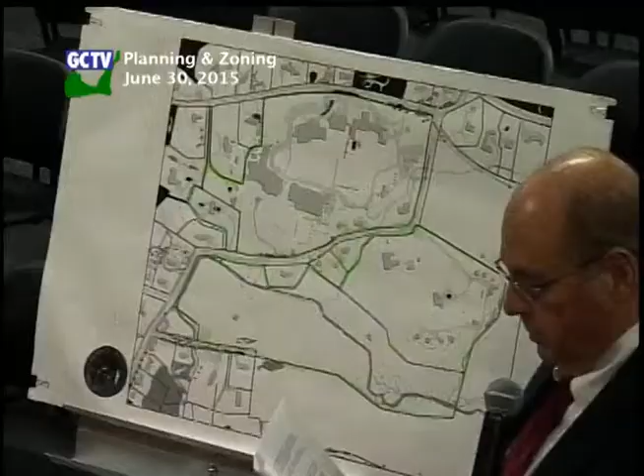Greenwich Country Day School is a co-ed private school in Greenwich, shown here on this GIS map of the town. It has two parcels: the main campus, which has about 33 acres, and lies between Fairfield Road and Old Church Road.

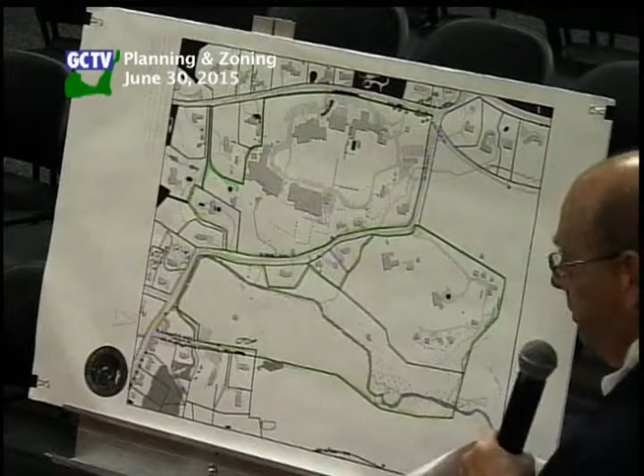Across from the main campus on Fairfield Road is the so-called Schwartz campus, which consists of about 41 acres, on which some of the school's playing fields and some staff housing is located. Tonight we are dealing with the main campus, and specifically the lower school, shown on the left.

This map is twisted around a little bit. North is to my right. Old Church Road is on top.

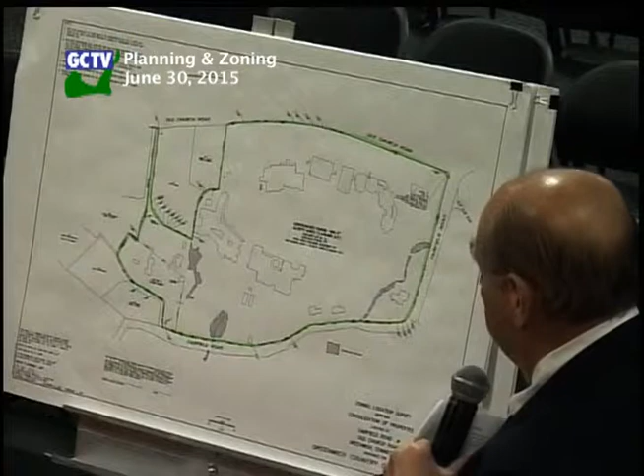The application for the re-subdivision is cast, as you know, in the form of a re-subdivision application, but it seeks confirmation from this commission that the revision of the lot line between two adjacent parcels is neither a subdivision nor a re-subdivision. That's based upon the deed history we've provided, and the fact that the definitions of subdivision and re-subdivision are not met.

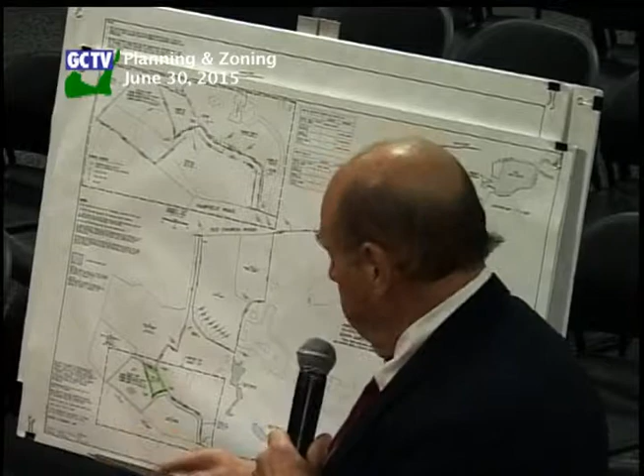The parcel that we want to convey is a piece of property to the immediate south of the main campus, consisting of about 12,600 square feet, and the reason we're doing it is simply to support the additional floor area and green area required for the addition I'll talk about in the following application.

I noted in the staff report, Mr. Cohen, you said 'convey' — from whom to whom? From an LLC known as GCDS to the Greenwich Country Day School. Obviously, that LLC is an entity affiliated with the school.

I noticed one of the staff comments, which I think you may have discussed at your Monday briefing, had to do with a timing issue — whether by agreeing to this, you weren't in effect providing excess floor area ratio for us that will be consumed by the existing buildings. I heard you were seeking Mr. Wetmore's opinion about that, and although we can all benefit from his counsel, I don't think it's a problem.

The reason it's not a problem is that your action, whenever it's taken — and it won't be tonight, I'll tell you why — is advisory only, in the sense that it's statutorily in your hands to determine whether or not a division of property or a revision of a lot line constitutes a subdivision or a re-subdivision.

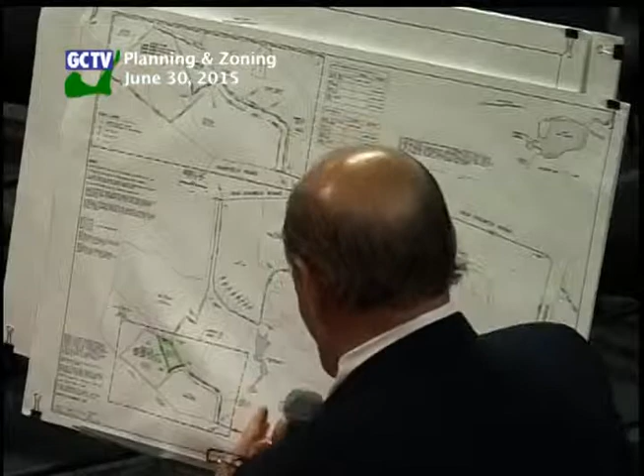We're not going to acquire any additional land until the approval has finalized. And in fact, this is not the first time this commission has been requested to do something like this, nor has done it. In fact, you did the very same thing in 2011. This parcel, a separate lot also acquired by Greenwich Country Day School, was approved on the same basis as we're requesting right now.

But I thought with that parcel, looking at the material, we remedied the nonconformity. You did not. You simply allowed a greater FAR to exist on the campus by permitting the so-called fish building to remain.

I don't think it's a problem, but I don't think you can act tonight on this application because we need a special exception which has been applied for, and we're going to be heard by the ZBA on the 8th of July. So I don't think you could take any action anyway.

Just one quick question on the matter of whether it is a re-subdivision or not. Is this going to be on town sewer, or does it have a septic system? Would Lot 50 have a septic system, or would it be on town sewer? Nothing is going to change from what exists right now. It's all sewer and town water.

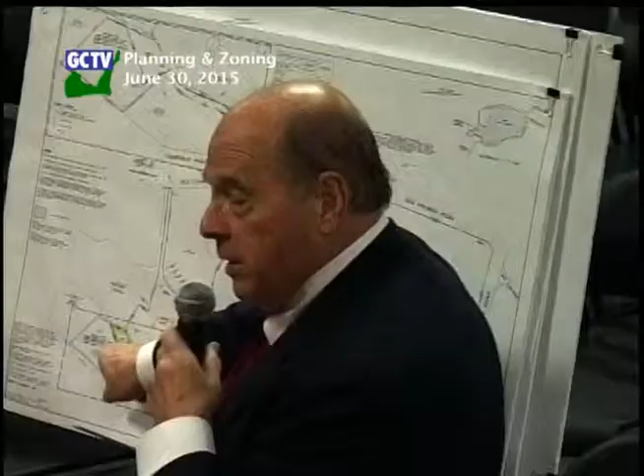I'm sorry, you're talking about the remaining parcel? Yes, what's going to be remaining of the number 50 lot. If the design of that lot included this parcel you're giving away for the septic system, then it would be a problem. I don't know the answer to that question, but perhaps you can seek that.

The question is, does it have a septic system on it? No, it's a vacant lot. It has no house. It's vacant, and we intend that it's going to remain vacant. I believe it is within the sewer boundary, but then the question becomes... if you could just tell us, we'll confirm that. But first of all, the school has no intention of developing that property. It's vacant land.

You never approve the buildability of a divided lot, even when you approve the division necessarily. Well, that's one of the tests of a re-subdivision, whether it materially affects the ability of getting a septic system on the site. Let's just say that was the only 12,000 square feet on the site that could get a septic system. It's the sixth item in 261.

We'll take a look at that. It substantially alters the shape of any lot so as to eliminate the septic and/or septic system reserve area without substituting another approved area. Well, there is no septic nor reserve area on it right now, nor has one ever been identified. But if you have a buildable lot right now, and then through this act of conveyance of land, you now remove the area that could be used for septic, then theoretically it could no longer be buildable.

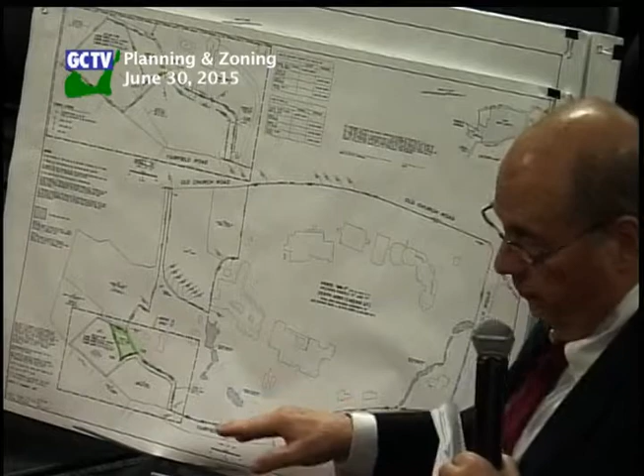Again, I'm representing Greenwich Country Day School, and I think we can show the area of the addition, certainly in the architectural plans that you have, but basically it involves adding a strip of building immediately in back of the existing lower school for the purpose of enlarging existing classrooms and adding a deck for outdoor activities.

Classes from those classroom areas. This is a copy of the aerial survey to show exactly the area that we're talking about. This is the lower school, and the area that the addition is being proposed is immediately on the eastern side of the existing building.

This has been through the normal departmental review. It's obtained a wetlands permit. DPW has reviewed and approved the stormwater management plan.

The comments from the zoning enforcement officer relate to the special exception that we must get to add that land, and also we're going to bring the addition of the building to the attention of the zoning board.

The only other comments I saw were from Alexandra Mock. She notes that some trees are going to be taken down, which you can see in that overhead shot, and the school will of course have a planting plan submitted. This is on a fairly steep slope, so the plants will have to be appropriate for the location. You'll be going to ARC also, won't you? Yes, we're scheduled for the 15th of July. We'll have a planting plan for that.

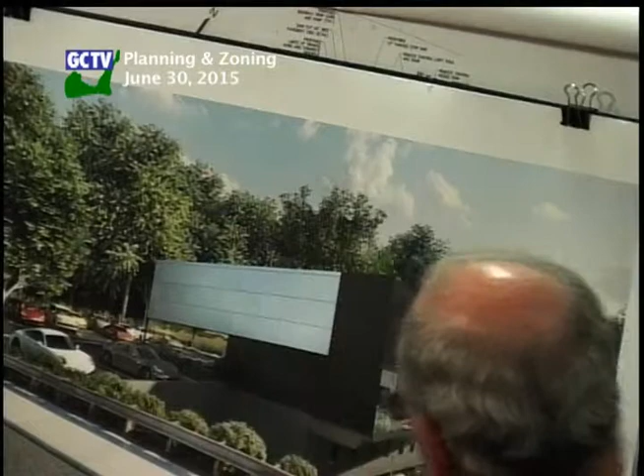They had a question on the exterior material. This is called black trapezium — other places in the country it may just be called corrugated metal — but we have these Alucobond panels on the upper portion, carrying the windows over, which is what ARC asked us to do here as well, making these panels larger, and they asked us to put another tree in front of the building.

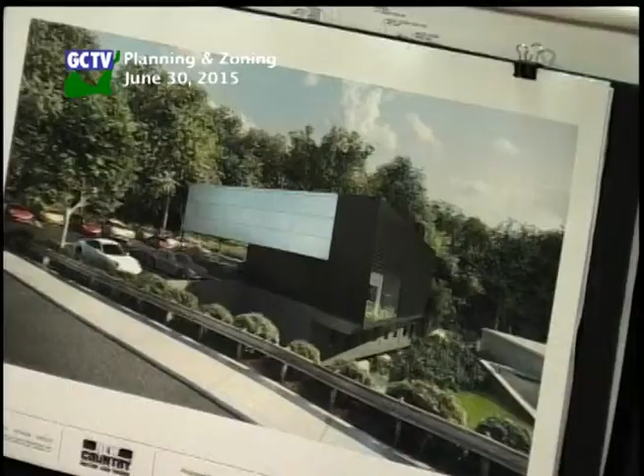So we've filed this with ARC for their July 15th agenda. They have seen this, and it was really not so much the material as the color. What we've gotten for them is a series of photographs of other Porsche facilities around the country. We did not make up this design for this particular building — Porsche has a design for all of their facilities, both service and sales, and we're following the guidelines in their prospectus.

So there will be no signage? Correct, there's no signage on this building. There will be no customer contact with the building at all. I'm just commenting on what I saw.

Can you confirm the hours of the facility? Chris Mackey from New Country is here — Chris, why don't you come up and respond to that. The hours are 7:30 a.m. till 6 p.m., Monday through Friday, and Saturdays 8 till noon. For this service facility? Correct.

Apropos of the work across the street at Audi, will the lights be turned off at a certain time on this facility? Yes, they'll be on electronic management controls. When will they be turned off? When we close. So, 6 p.m. close? Well, there could be employees in the building until maybe 7, but for Audi we had said 7 p.m. as the limit.

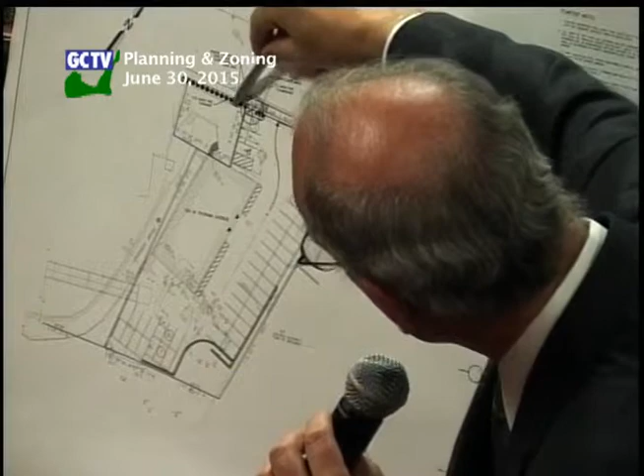This is the property line, and actually these bushes are a continuation of the ones along in front of 200 and 181. It's the Mugo pines that we're proposing, but it's on state property.

So my question was, is there a problem with that? No, you deal with DOT on that, and they provide you with approval. Have they done that already? Since the only thing we're proposing is just those shrubs, no, we haven't taken that to them yet.

When would you do that? We would do that between final approval and submitting for final review for building permit purposes. That was a condition on the other projects for Audi as well.

I know that's up to ARC, but the ARC is advisory to you. Mr. Hegney said something actually very interesting to me - if this is a service-only building with no contact with clients, it would seem odd then why would I go through all this time and trouble to fix this building up if it's just a repair facility for the company?

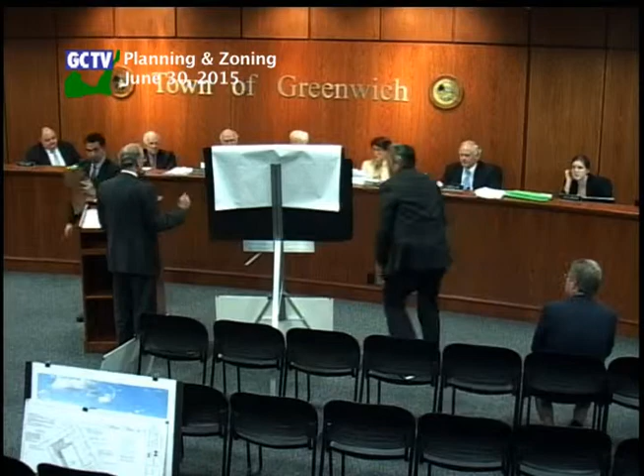Mr. Hegney had the questionable - it's black? This is our architect, John Penny. John Penny: any new facility that gets branded will have the gray ACM in the front and then the black trapezium towards the back. That's a Porsche national standard.

But why didn't you wrap the tan or whatever the front color is around the end, over that glass? That's kind of what we're asking. Typically, because this is a unique situation where there's a split facility - you have a sales building and a service building - the service part of the structure wants to be all black trapezium.

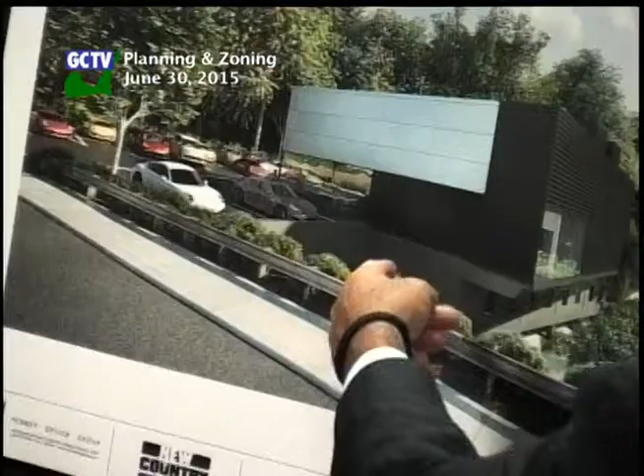Porsche would like it to be all black trapezium - this was a compromise with the gray panels because it fronts West Putnam, to add a little bit of interest, and we have these windows going halfway across, so the whole building wouldn't be black trapezium, which would be pretty ominous. Those windows open up into a service bay, but they're tinted.

Nick, what do you think? Right now they look like you can see through them - or am I seeing a reflection, am I not seeing a reflection? It's a reflection for the outside. It would be a gray spandrel panel, so it would be an opaque window.

Mr. Hegney, did you see the beta report? Yes, I did, Mr. Chairman. Comments, please? I didn't see really anything in here that I thought was an issue.

They talk about the existing driveway that's 30 feet wide. They were looking for a radius on the roadway. We can certainly provide that, but they get deliveries from SU-30 vehicles now, and the 30-foot wide driveway apron shouldn't be an issue for that at all.

And then they asked about the drive aisles. Again, this will not be utilized by customers at all - it's just the valets that New Country employs who will be driving the vehicles. The aisle that goes down by the building, down to the back, slopes down, where you've got the tandem spaces - those are only 15 feet deep.

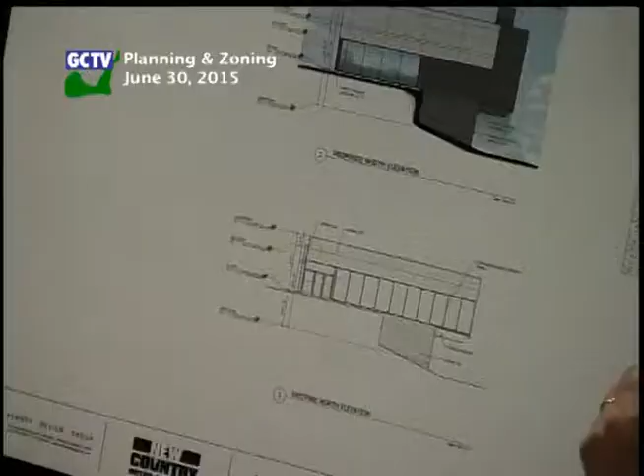I'm still - there was one other thing I did want to point out about that. The service bays on the lower level are built for small cars. They are not built for trucks. They fit very tightly into the space. Let me just show you. No, believe me, I know that. But what I'm trying to say is I just want to make sure that this can't be somehow transferred into something else, because it is a tight number.

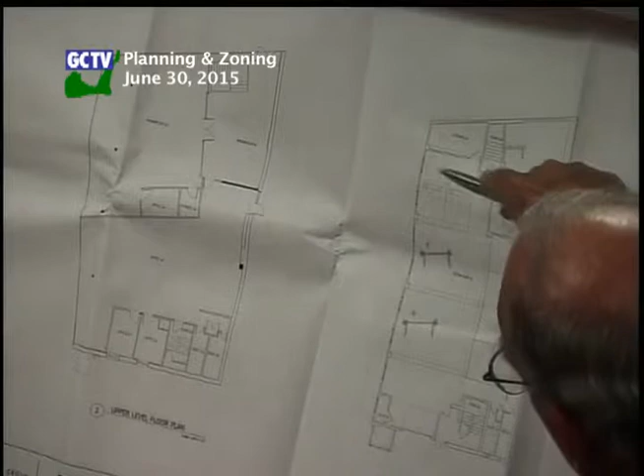So I don't know if we can condition this just on a car which does not exceed 15 feet in length or so. Well, the other point - that's only, 15 times 12 is 180 inches, right? I just wanted to point out on the lower level, we have 8 service stalls, but as you can see, it's very tight in that space. I've been there, that could be a whereas clause. The reason there are 8 is due to the fact that the cars are a certain size, so we just say something to that effect, that there's not a non-conforming situation being created as it relates to larger vehicles and potential traffic and vehicular circulation issues.

Because the other thing Beta already brought up is that the travel aisle along there is not going to be the 23 feet, which I don't have a problem with. I think a 20-foot aisle with this kind of maneuvering is fine. I was just concerned about the depth. But further on the traffic,

I didn't realize this until I was looking at the drawings today, but if you go back to your first drawing - this one - there is a sign, a stop sign, as you drive out onto West Putnam Avenue. And below it is a no left turn sign. I didn't realize that until I was looking at it today. So everybody is turning right, which seems to cause a conflict with cars being shuttled to the left over 241.

Because that's where people will pick their car up after it's repaired, is that correct? Correct, except for the ones that are delivered home. So out of those 14, 9 would be picked up and redelivered. So then I started thinking that perhaps what you were planning on doing is using the bridge and going into Audi's property, which is what Nick wants to do.

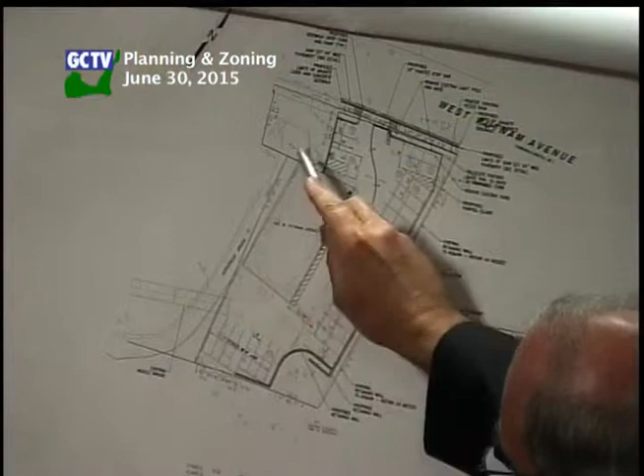Okay, coming back to the siding - is that the existing light you're referring to, or are you putting up a new light? I assume they're new lights. No, those are new lights, they'll all be new LED lights. Okay, I was just checking - I was out there today, and the light that's hanging there is literally facing only directly towards the building, I couldn't imagine how it could put off any light, but I just thought I'd check. No, these will all be new LED fixtures.

Okay, wait - if you're not going to do lighting, I get to go back to siding. I'm doing something about phasing - no, let me go back to siding, because I don't want to get sidetracked on this.

I looked at Los Angeles and Palm Beach at West Palm, where they have facilities - I think those dealerships in volume may be comparable to ours, and my question is, those are silvery. And then I drove down West Putnam a couple times this morning, and what strikes me is the Benz building and the work that Miller has done - those are light-colored, modern buildings, and suddenly we're beginning to put in more of this black monolithic siding. The fact that it doesn't wrap the way it does in the other buildings bothers me, but really what I'm asking for is something that blends in better with where everybody else is going. I know you want your brand to stand out and all that, but I don't like that.

I don't want this to sort of be something that draws your eye into the darkness.

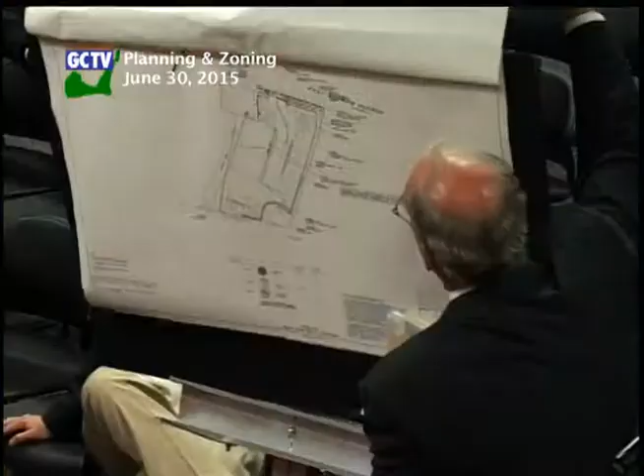Good evening again, Mr. Chairman. This is the Audi sales and Porsche sales and service building at 241 West Putnam.

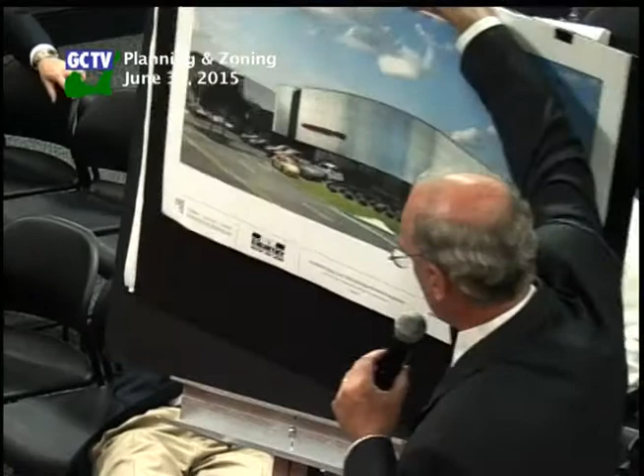You saw this a couple of years ago when we enlarged the canopy for the drop-off area, which is on the west side of the building. And just to show you, that is on the west side, and that is the black Trespa material that is there now.

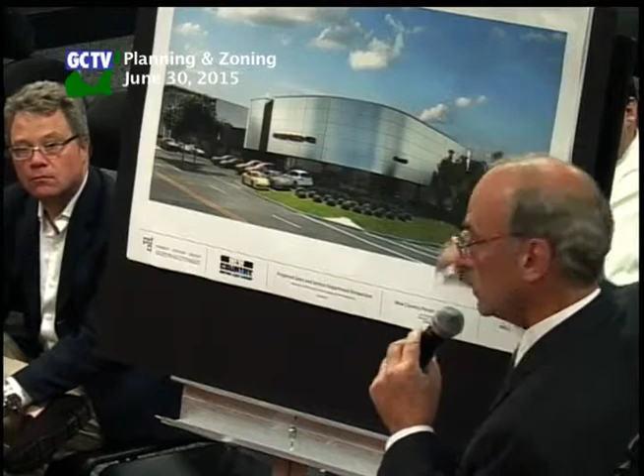We would be including some toward the Edgewood side, but primarily it's the silver band that you would see from the post road. This building, we're really not doing an awful lot. We are changing the skin of the building.

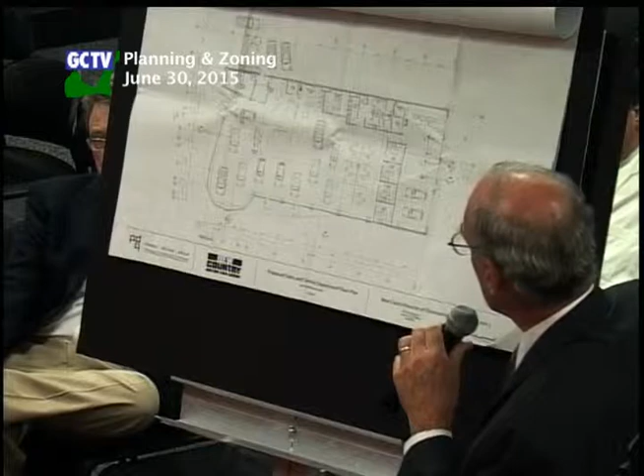We're taking the inside and creating more sales and office space. Currently the service bays end here, so there'll be additional space for sales, offices, and display of vehicles. There'll be 5 service bays in the back. There's currently 1 garage door - we'll be adding 3 garage doors, and that's basically what's going on with this building.

I think in this one particularly there are much more questions for me than on 180. Right now, the plans - SE Minor has submitted some plans for the parking along Edgewood, which don't agree with the parking plan that you've submitted and the landscaping plan. So which one is this, the one we're going with?

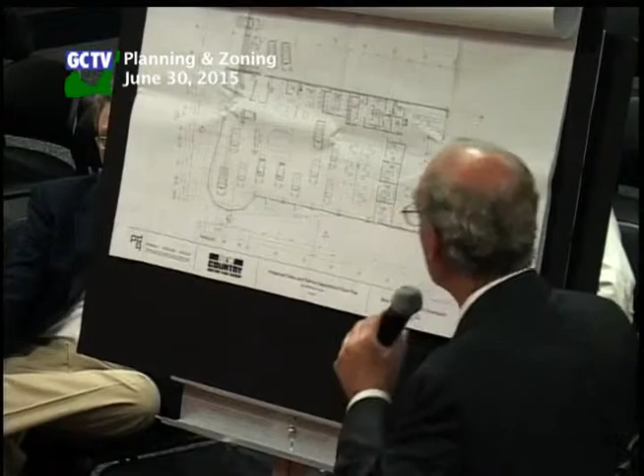It's the landscape plan that we'll be going with. Currently, as you know from the SE Minor plan, there is an encroachment of the parking spaces on Edgewood - that's what I'm going at - which would be eliminated. So these spaces, which look like they're regular parking spaces, actually are over into the town right of way. We're going to talk about that.

The question then remains, right now there's no curb in that area, so how much curb is being added in? Are you going to still maintain the 2 driveways on Edgewood? Yes, we would maintain this driveway here on the north and this driveway here on the south.

Now, some of the drawings describe and talk about having a one-way circulation pattern on this site. Can you tell me, first of all, why are those surface lots opposite the stackable going in the wrong direction for one-way circulation?

They bring them out here when people are picking up their cars, so they'll back them into here and then deliver them here. But how can you do that? You can't have two-way traffic in there. Well, they're going to pull in here, then back this way and leave the car there. I don't think it works.

Because somehow you're getting two-way traffic there. You want them to come out and just go like that. Oh, if the car is in reverse.

I think this needs to be looked at, because that's one of the concerns on Edgewood that we need to address. Starting with the revision to the parking where you're out on Edgewood now, it's good that you say you're pulling it back. So it would now be necessary to establish a curb out there.

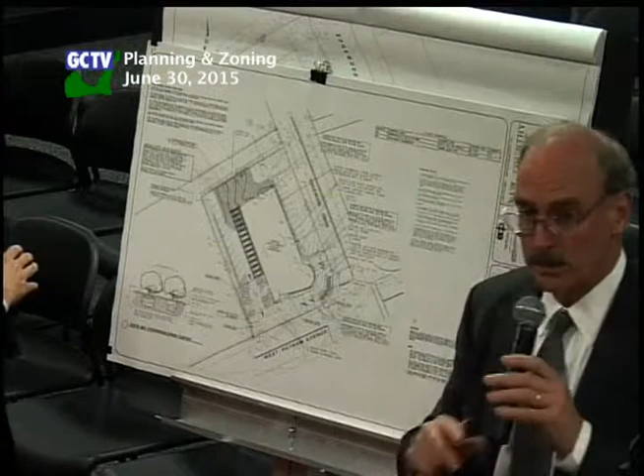This is Dan Tompkins, our landscape architect. Hi, Dan, what is your business? I'm a landscape architect, I'm the landscape planner. Hold the mic closer, please.

New Country, I just want to point out that there is a strip of grass here, and there is curb there. It's poorly defined because it's not a full 6-inch reveal, so can we get a decent curb there. Okay, let's start with getting a decent curb there so people are not encouraged to drive over it.

And as far as the diagonal is concerned, it was anticipated that it would be just employees of New Country operating in this zone here. The cars are dropped off, they're handed off to the employees. But that's not possible if you've got customer parking there. The customers, when they pick up their car, how are they coming off the site?

Well, they could, for example, the customers are going to be back there. If your customer's car is faced out towards the aisle, it would actually be easier for them - it would be faced out towards the aisle. So wouldn't they be faced this way? So when the car's finished...

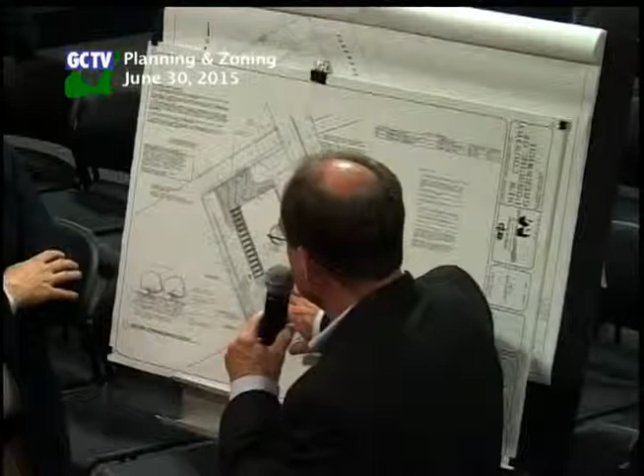Is your mic on? Yeah, okay, so take us through the process slowly. Sure, when someone comes to get their car, these cars that are not already delivered to their homes could be waiting here, but they're faced towards the aisle, not faced in. So now someone gets in the car and they just go out to Edgewood. The problem is that on your parking plan, you've defined that as new vehicle parking, display, and inventory storage.

You've not defined it as customer parking. That's true, but there can be overlap to that - the need is going to define that. So how is that car, when it's been serviced, driven there and backed into the space? Then the customer comes and picks it up and drives out?

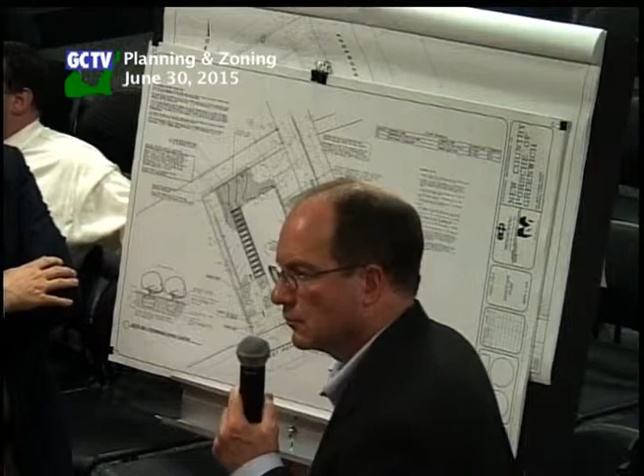And the cars that are repaired here will then just back around the corner and back into those spaces? The kind of activity here for service is going to be like what they call prep and detail. It's not going to be someone handing the car off to, for example, get an oil change - all that kind of work is going to be over at 180. But the customer still comes here to drop his car off.

Right, comes to pick it up. So you did an oil change, what do you do with it? How do you get it back into the parking? Well, right through and back in and waiting. So where the customer - you've got a one-way loop behind the building also.

How does it work if the car backs out of the driveway at the service door closest to Edgewood? He has to back across that, go around the corner, and back into traffic going the other way.

If you're talking about employees only in there, I'd say fine, you guys can figure it out. But you've got customers going through there and they're unpredictable. I'm just not sure that system works, and there's no way for you to loop that on your site. It doesn't seem to work to me.

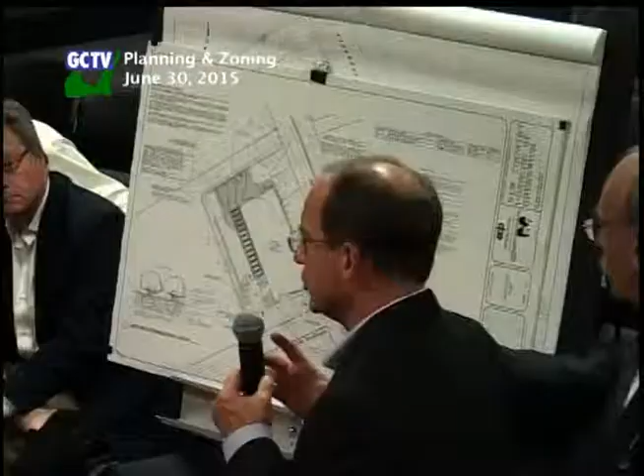This is what we want. Maybe if you describe the customer circulation, what happens from the customer's standpoint? How do they get dropped off? You've got two customers there, people coming in for service, and now I want to go buy a car.

Where do I park? The customer parking is out front. Oh no, that's new car storage. I mean, that's what your plan shows, because I was looking for where I would park. You've got two parallel spots out there.

I just don't think this works, in my opinion, and I really think it needs to be evaluated. I think someone else here is going to mention the idea of getting further landscaping across the front, but we'll talk about that in a minute.

I'm more concerned about the use of it. I'm back on Edgewood now. Let's circulate the drop-off part. The drop-off is just here, so you leave your car and go inside. The service manager is there in this building?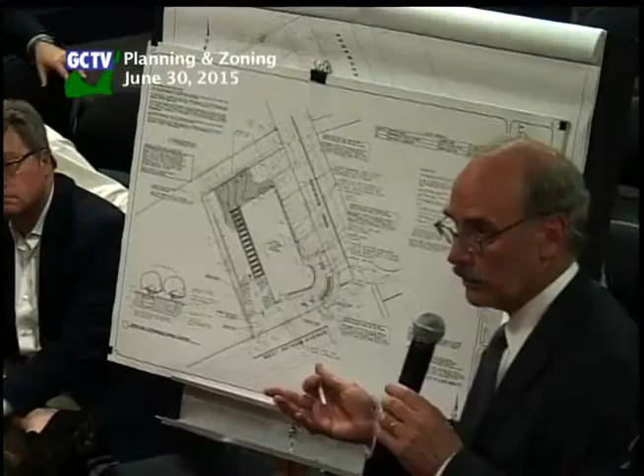Do you give him a loaner, or what happens when you drop your car off here? New Country has a van, so it'll take you somewhere in Greenwich. But you don't give out loaners? Don't give out loaners? Yeah, they do, they give out loaners.

Where do you get the loaner physically? That would be given to you at the service drop-off area. So now you get the loaner and find it in the front? No, the loaner's probably going to be parked in those diagonal spaces. They're not color-coded properly, so it will be difficult, and they'll have to go around the building.

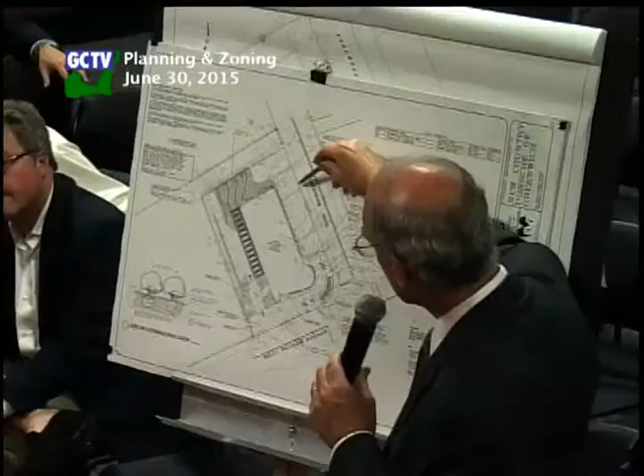Okay, right, and that comes out onto Edgewood. The green strip that's on Edgewood, the existing one, you had said that's going to remain? Yes, we would have that remain. Well, I think it should remain from the property line out to the curb, and I think that curb should be replaced.

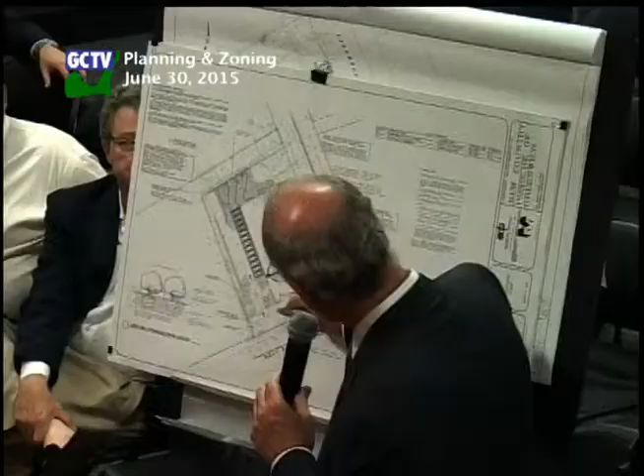Now let me look, you've got the handicap spot, Andy, which one is the sidewalk at the driveway closest to West Putnam on Edgewood? We have one here and one over here. I'm sorry, the only handicap spot I see...

There's one off of Edgewood and then one off of West Putnam. Okay, well the one in front of the building was unclear. I saw the one off of Edgewood, but I didn't see the one in front. I didn't realize we had two handicap spots. Is there a reason for that?

But those are diagonal right now, right Bob? Yeah, they are, because of the number of parking spaces, they're required to have more than one. Okay, the diagonal spots coming off of Edgewood, you've got the one handicapped and two other spots there. Correct. So you pull in off of Edgewood into those spots, and then you back out.

Well, no, not really. Are you sure that's one-way traffic that way? I'm asking because there are no arrows on the plan. So the question is, behind those pre-owned cars, is that two-way or one-way traffic? I think it has functioned in the past as two-way.

A lot of these things are missing from the drawing, it's very difficult to read. Even if you go through the comments we got from Beta, they had a lot of problems with some of these movements too. So I think that needs to be looked at, an overall circulation plan and how that works with the coordinated drawing between the landscape architect's plan and the SE minors.

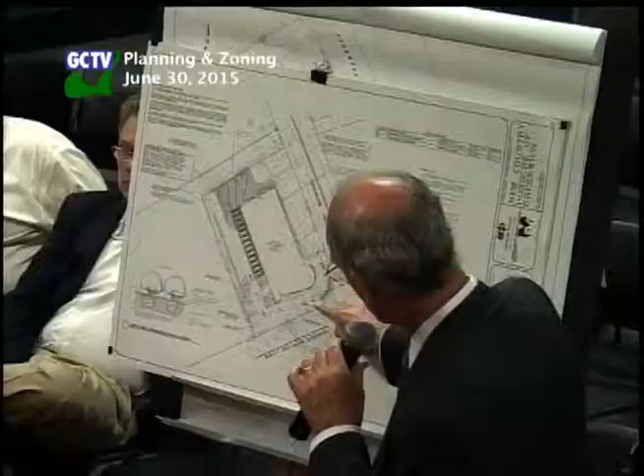Andy had some comments, I will echo what you're going to say, I think, but the comments about the front of the building. I think we need to continue the sidewalk from the west down to the corner, make it concrete, so it's a clear definition of a sidewalk. I've driven by there now almost every day getting my coffee, and this is the last dealership that has no delineation of the sidewalk in front of it. I think at a minimum, we have to do it at this site plan.

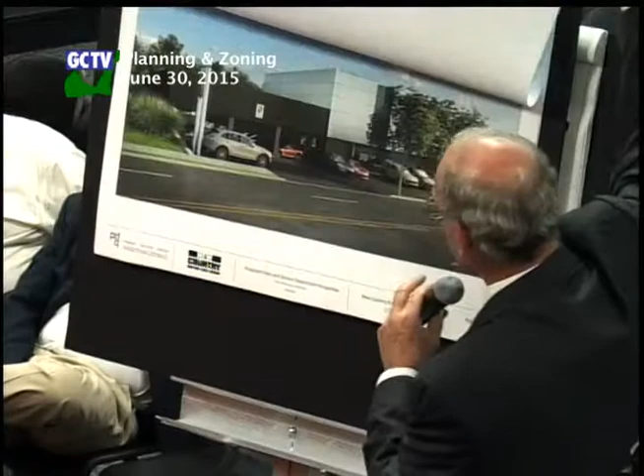If you put up the first rendering you did, you have the sidewalk. It dies, it stops at the corner. Go to the rendering. The next one, I think, shows a sidewalk going across your property that's not there. There you go. But see, that's what it does, it just ends there.

We do have this landscape area and the two trees. I think for public safety, the sidewalk should continue to the crosswalk, to match what Mercedes has done, where the entries are concrete and then the parking is asphalt, and it's clearly delineated.

The other question, you have all this stackable parking against this building. I would rather see it at the other site, because it's hidden against a wall.

If you ever want to, pull up the site plan again, please. And if you ever wanted that diagonal parking to be for customers to pick up cars, having the mechanized storage there, I think, is in conflict. So I think if you move it to 180...

I don't think that site works nearly as well for the stackable units as this does, because with this canopy and the building itself, these are all hidden. You just don't see them there at all, except if you're picking your car up for service at Mercedes.

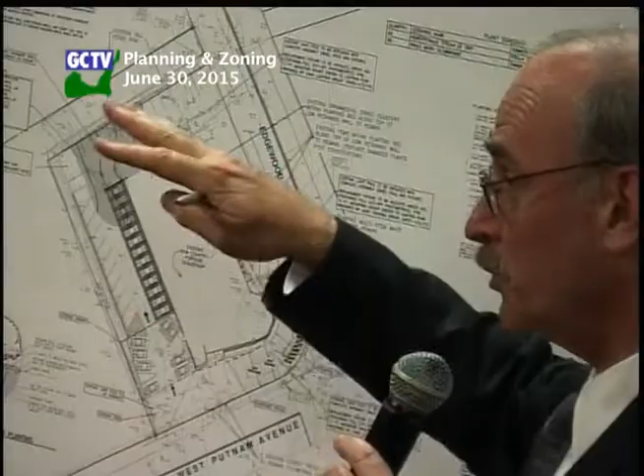So why does it say 39? Because we took 2 of those units away when we expanded the canopy, and when I submitted it this time, I counted the grade level rather than just the 2 that are in the air.

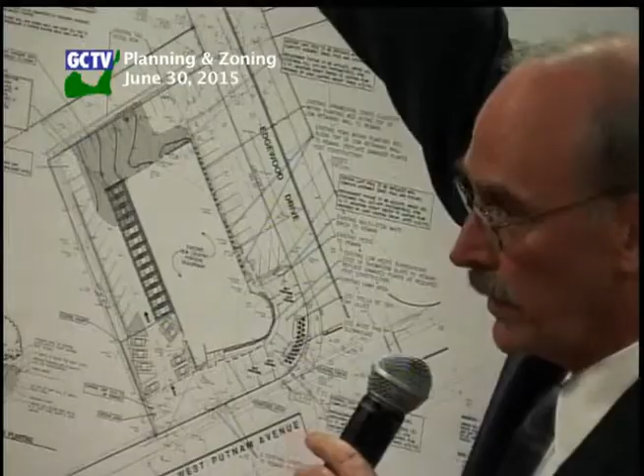So are you okay with going to 30? With saying it's 30 again? No, what he's actually saying is it's 26 rather than 30. Rather than 30? Right, so it's less. Okay.

Let me say this again. I was describing it differently this time than last time, saying something like not more than 30, and putting that number back in there. The reason I'm asking is, why say 30 if he's going to do...

No, I'll say 26. That's what's in the stipulation, and the stipulation says it cannot be changed by either you or us. It will be less than 30. But the stipulation says 30, and it cannot be changed. The number can't be changed to 26 either, unless you go back to the judge, and I'm sure you guys don't want to do that.

I don't think the judge would want us to do that. It's already been changed because the 2012 approval removed 2 of the 15 to make it 13 times 3. But the first level is not being counted, so it's 13 times 2. That was done as part of the last site plan. Fine, it's already been done. The fact that we made the mistake once doesn't mean we have to make the mistake again. I'd like to set it straight, because I don't think we were aware of what it said in the stip the last time.

Was it a mistake? I don't know. I asked yesterday and didn't get an answer, and I'm a little concerned that the stipulation says nothing can be changed without going back to the court. I'd like to leave it clean for both sides, for both of us, so we don't have any problems.

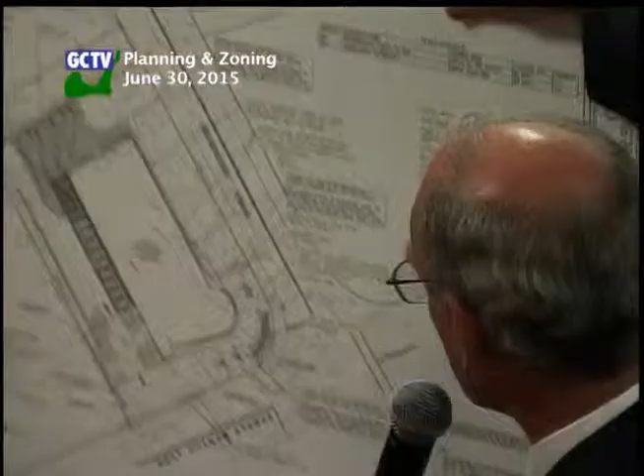One of the other questions is you're adding 2 doors in the back to the service bays now. You can leave that plan up if you want, but you're reducing the number of service bays overall and also changing their function to what I call new car prep, as opposed to oil changes and whatnot. Well, we do have an alignment bay as part of this, and we do have lifts besides just detailing. Why do you need more doors if the number of bays is being decreased?

I ask only because it's the residents - I mean, I know there's the pond and whatever behind you, but then there are residences behind that. I'm just turning to the north elevation, wondering about the impact-wise on those residences.

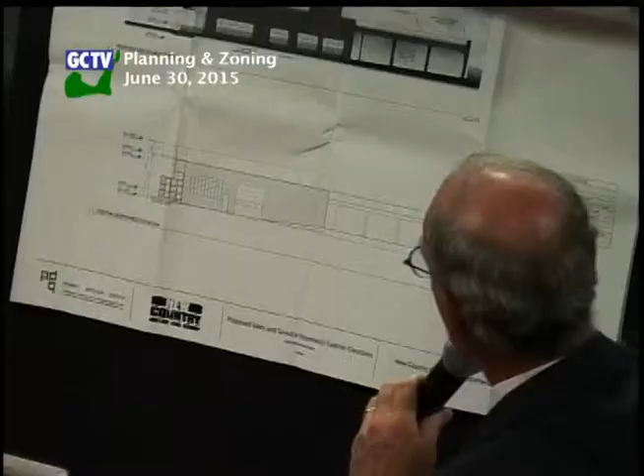Why is that? Currently we have one center door, and the service bays are off to either side of the building. Now, we're going to have each of the bays directly behind the doors, so you just drive directly in rather than driving in and then turning to one of the service bays.

And will those be open all day long while the cars are being serviced, or do they open and close throughout the day? They will be open and closed. They will not be left open.

Okay, what else do we have? Do we have anything else? Yes, Mr. Hegney - has ARC looked at this yet? Yes. What did they say about the increase of the facade?

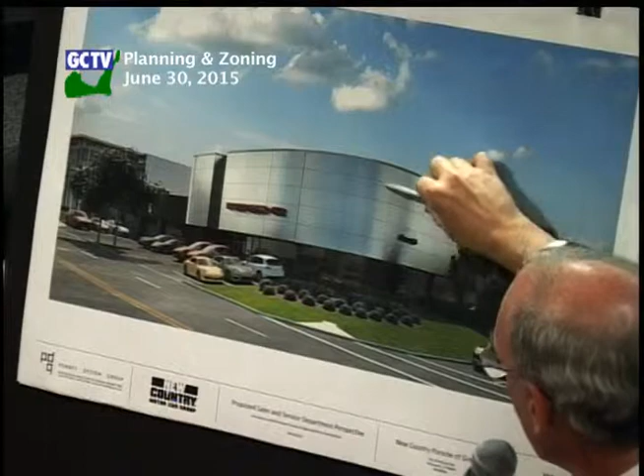We spent a good deal of time talking about that, and we've also talked very recently to people from Porsche North America about the overall height. One of the things ARC asked us to do was eliminate one of these bands, and based on our recent discussions, we believe we'll be able to do that. Just one band? Four feet.

Do you mean the band, or the height? The height of one band. Both. So one band, which is 4 feet, will be reduced to this level, which will make it just a couple of feet higher than it is now.

The increase in the facade is just a branding issue? That's what it looks like in the rest of the world? Correct. If you saw some of the photographs, you saw what the concept is.

My concern on this particular intersection is that we keep encroaching on the street with these large masses of buildings. I think actually a good example is the Mercedes next door. It doubled in height and seemed to sit right on the street. If there's any way to see your way to maybe one more band and bring it back down again, that would be great.

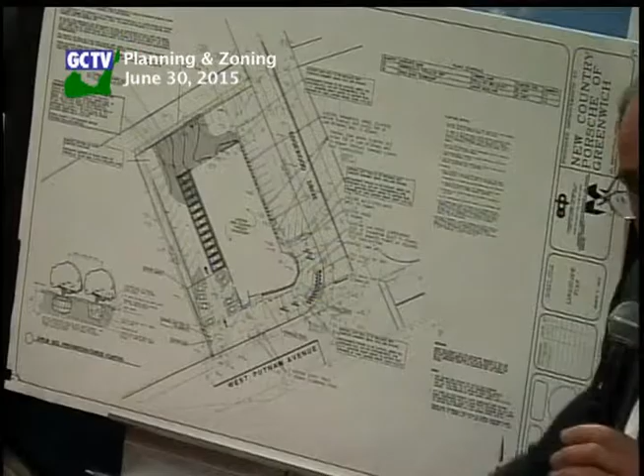Well, Nick, I have to say that we're reducing how close it is to the corner here. It comes no closer at West Putnam, and this portion is actually brought farther back, so it is being pulled back. Pulled back in, and increased in height. And I think that's the issue I have - even though you're pulling it back, you're increasing it in height.

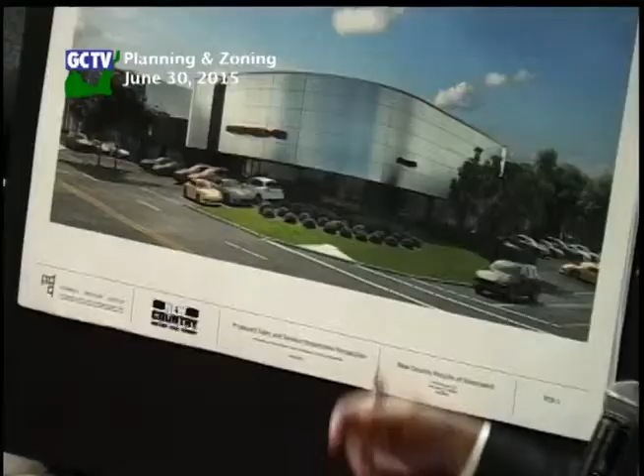That came clear from the ARC members, and their question was, well, can you remove one of the bands? It's just been recently that we've gotten word back from Porsche that that would be acceptable for them. But it's only 4 feet.

Well, yes, but when you have 5, it's a 20% reduction in the height. Are you going to be revising the drawings you're submitting to us to show this height change? Yes, we'll revise that as well.

Okay, what else do we have? I would add that there's no change in the height of the roof on this at all.

On the two curb cuts out to West Putnam Avenue, are both of those required? And do they have to be the dimension that they are? Because they seem to be quite wide, and is there any way that those can be reduced? Well, currently you have car spaces that face east and west, and then also north, so in order to access those, we do need a wider curb cut.

What we can do is, as part of looking at installing the sidewalk, we'll look at the width of the curb cut itself.

Okay, I would like to, since it was brought up in the other one, put into the record the letter from Finnegan. There's a number of items, and just hear if you've got any comments. Number one is ensure the adequacy of customer parking for sales and service, and prohibit any on-street parking by customers.

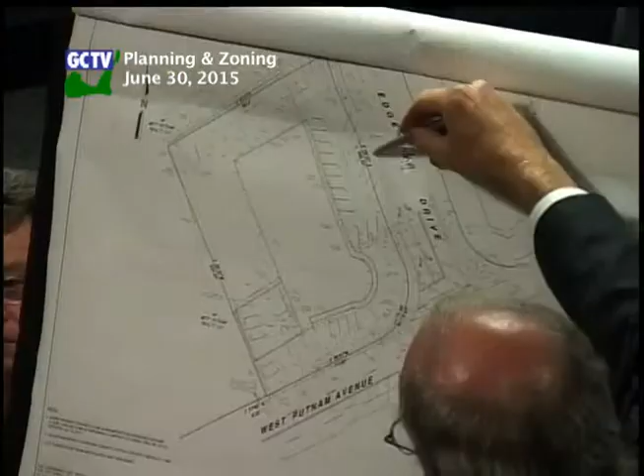It's right here, and it is signed, and it's something that the police department looked at and wanted there. But parking and so forth is not really our purview - I just want to make it clear it should be gotten into the record that maybe one of your drawings could show that area that's signed for that purpose.

Certainly, yes. Because that big section is in the commercial portion of Edgewood, not the residential. No, I do understand that - Edgewood, rather, excuse me. Okay.

ARC approved lighting plan, okay. Well, we did have a fair amount of discussion with ARC about that, and they were looking for us to provide a recessed light on the fixture. We have a revised fixture to bring to them, the actual fixture itself, so they can see how it functions. So we are addressing that.

All right, well, require fully compliant soundproofing and rooftop screening of all exterior mechanicals and rooftop exhaust fans. I know they're screened, and there was a comment brought up in the staff report, and we didn't touch on it.

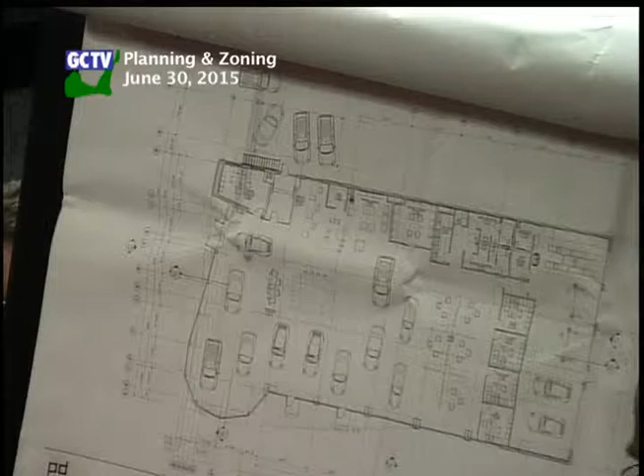But with the other building, because we're taking that roof off and putting it back on, we can move the air conditioning or air handling units to the center and meet that 25%. On this roof, we're keeping the existing units.

What we would like to be able to do is properly screen them, but given how large the roof area is and where they're located, I think only two would have any impact on any neighbors. The others are going to be in the front where it's hidden by the new facade, so I don't think that's really an issue.

The question is about soundproofing - I assume they'll just all meet town standards for noise. Yes, okay. That's all, along with the landscape plan being approved by ARC.

Now, on one of your drawings you submitted, if you could go back to the site plan for a minute. It showed parking along your north property line, with a band of planting along there, and an existing tall hedgerow right along here. Could you bring some photographs of that when you come in next time? I think that does provide the screening to the neighbors.

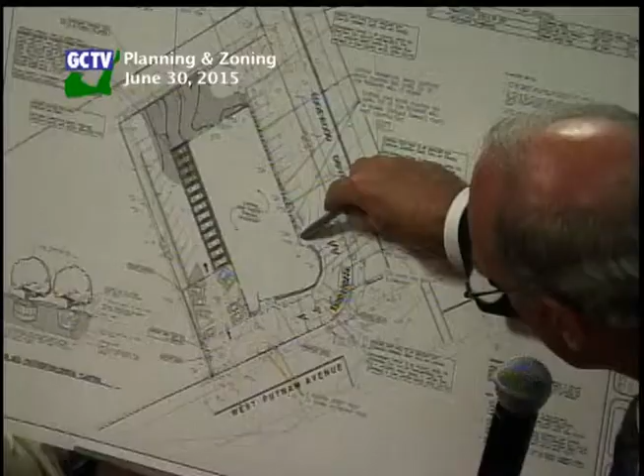One of the other things we were thinking about: there's a walkway 4 feet wide that goes around the showroom, and it really doesn't serve any purpose. We would prefer that people walk through the showroom rather than around it. That's about 100 square feet, so we could remove that and make it green, which would free up some space in the parking.

He also says to prohibit any exterior intercom system. That's fine, we don't have an exterior intercom system.

He also asks that the new dealership name somebody on file with P&Z for after-hours car alarm activation situations. I don't know what the file is going to do with PZC after hours, since there's nobody here. How was that handled? There was something done as part of Audi - we provided the names of the general manager and the head of facilities for New Country, with cell phone numbers, so that they could be reached if needed.

Could we give them your home phone number as well, since he can't turn off the alarms? No, and I don't even live in this town, so you can't find my house either.

That last part's not true. I would hope not, since you're a member of the Planning and Zoning Commission. Somewhere else for me - do they have a copy of this note, Dick?

I think they do, we just gave it to them tonight. Yes, and there's just the controlling of the trash pickup, before 7 and 8 a.m. We'll see what we can do with our trash hauler in terms of that.

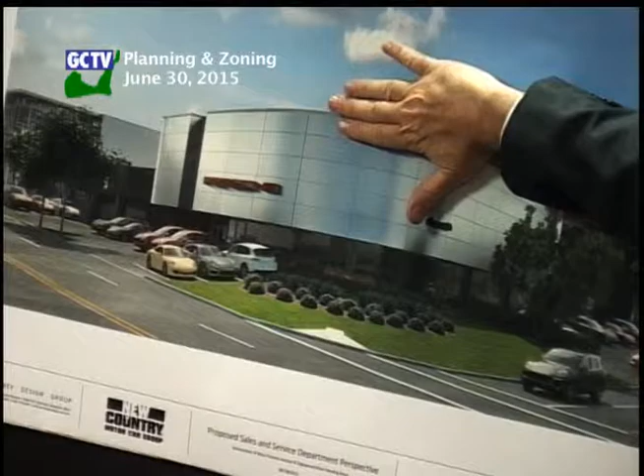The other site, and I know I'm mixing the applications, this is the look they're doing, because it's primarily the Berlin sales building. The Berlin one has a wider glass in the front, a bigger opening of glass in the front. Looks a little - I like it better, I think it's just better, but again it comes back to the comments on the other application. This could be perspective too.

And you said the other facades are black on this one? Because the existing ones are gray or silver. Well, what you see now is what you'll see, which is silver, basically. We've been saying gray, but it's silver. In the beginning, I thought a portion of this was black. I believe I talked about the facade in 2012.

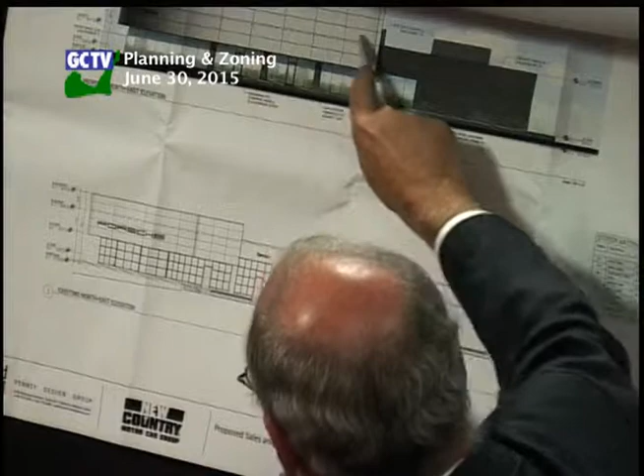So right now, is it that black? Currently this is all service area, so there are no windows here. We're putting in these two windows, bringing this farther back, and this will be the black material back there. So that's going to become black. That won't change, that's the material you see right now.

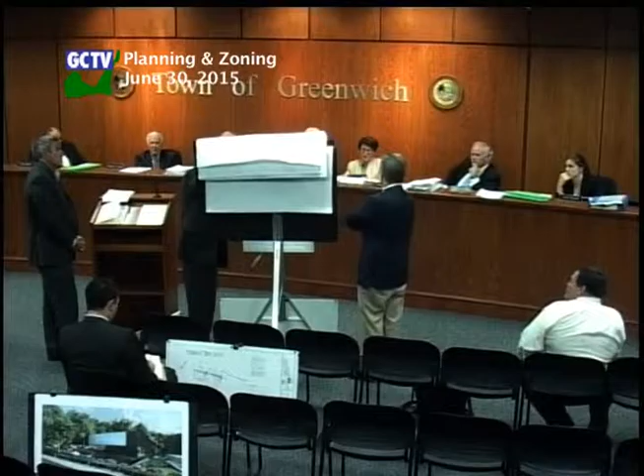How would you screen those HVAC units on the right corner? They have screening panels around this, at the roof level. If we remove the service bay, go back to the roof plan. There's a system of screens around it for the units, called Advisor, that sits on top of the rooftop unit and fully screens it on four sides. Is it going to be the black color? It'll match the black trapezium. If you look in the upper right-hand corner, there's a diagram. It's hidden, there you go. So they're all screened with that.

I think you've gotten direction. I have one last thing. When you go back to ARC, could you show that car stacking system against the building? It's not on the elevations now, and if that's part of this application, it would be good to see that. We'll show it in the longitudinal section of the building so we can get a sense of the rack against the building, and provide a cut sheet.

Mr. Hegney, do you think the stipulation is still in play with this proposal? As far as the stackable units go, yeah, I do too. We've continued that, they haven't done it. It should be noted for the record that there is no CO, so to speak, on the canopy, so that goes with your argument that it's still open.

Okay, thank you. Mr. Hagney, before you sit down, I'd like to, on behalf of this group, congratulate the library on its latest acquisition of you as a trustee. Thank you, Mr. Brooks, it's a pleasure serving on that board. Continue your good work. It's not nearly as arduous as what you do these Tuesday evenings.

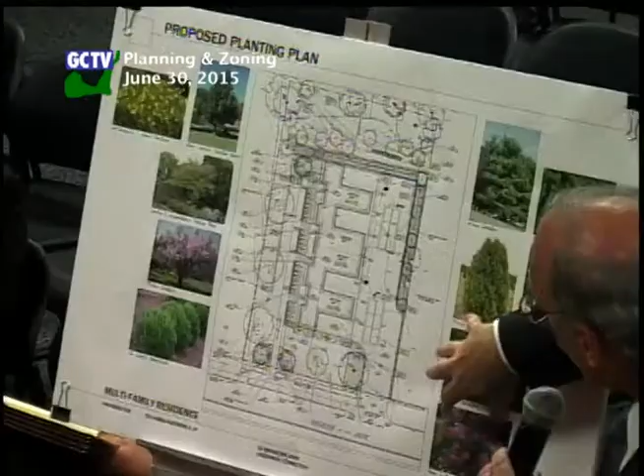This is 52 Brookside Drive. It is very close to the first application that I presented to you this evening, which is immediately to the west - the New Country Service Building. To the north, we have an office building and then the lighting store with its other activities going on in the yard. To the south, we have the Pathways facility and group home.

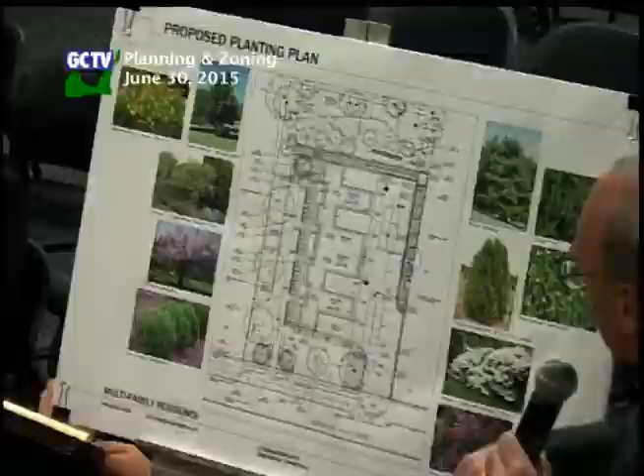And across the street, we have the backside of the A&P with its loading dock and generator. To the west of this site is the Porsche service building at 180 - let me clarify, this top of the page is west. I haven't gone too far in any direction this evening. Hopefully I'm making a little bit more progress with you.

The building that's there currently is non-conforming, 3.5 stories with 3 units. When we first started looking at this - it's a 15,000 square foot site - based on the regulations in 6-10, we would be able to locate and construct 6 two-bedroom units on it. We didn't even try 6 units - we started with 5 units, 2 bedrooms each. We discovered after spending a month or two on that it was just not going to work.

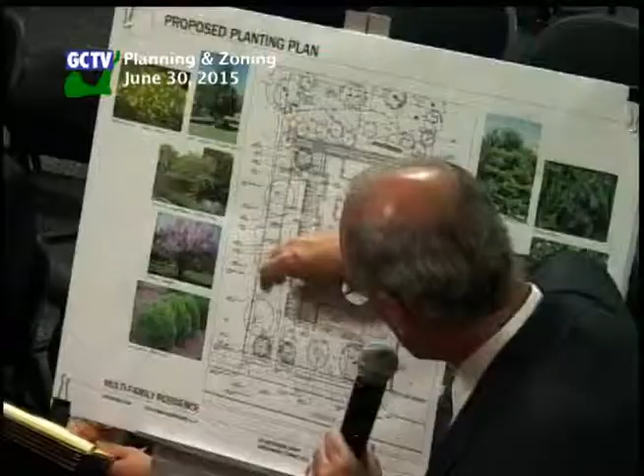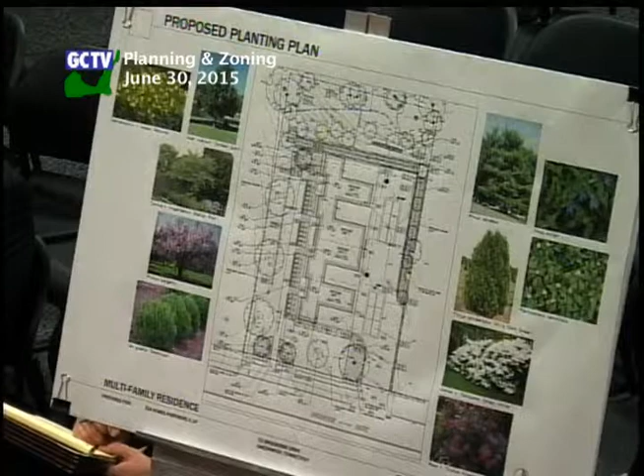The grading is such that you're dropping 30 feet in elevation from the front to the rear, and that really precludes the ability to provide adequate retaining walls and parking because the site drops off so much. We're in the GB zone, so we have 30 feet of side yard on either side, which we do meet as part of this plan. So what we have developed and are presenting to you is a 4-unit building, 2 bedrooms each, with garage units and carports.

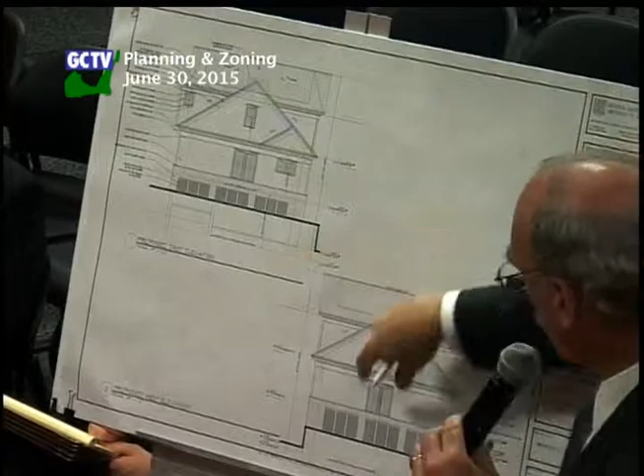I've been having a discussion with the zoning enforcement officer as to how we meet the requirements of the carports, and what he advised is we have to allow for - and I have an elevation to show you - openings so it's clear it's not just where you drive the car in as a carport, but the sides are open on the east and west side, and that it's also open carports on the south side of the building. He said that was acceptable.

How does that work on the 2 center ones, not having the same openings? We have the front and rear open, because it's open on one side where you drive in, and then we have lattice here on the south side. On the end units, it's actually 3 sides that are open. If you look at your foundation plan, right now that's a bunch of crawl spaces - could you put up your foundation plan?

Okay, so you've changed... Yes, we had to change all of those plans based on zoning enforcement and staff comments.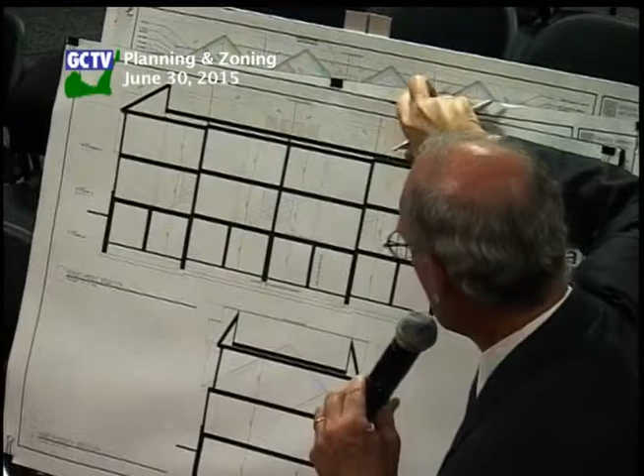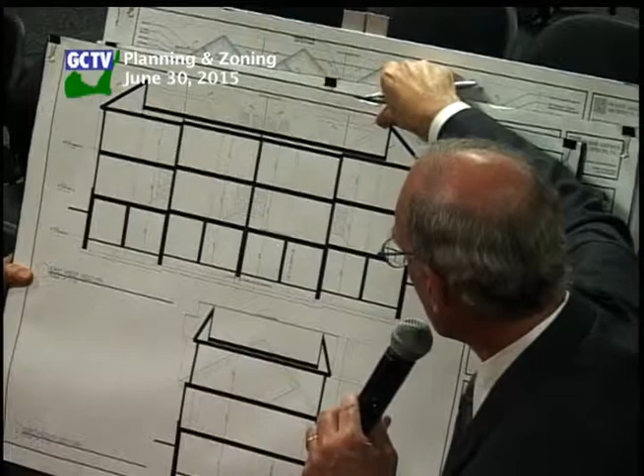The other issue that was raised was the height. We thought we could have trusses above the third floor, but we were told no, you have to have either a flat roof, or it's going to be called a half-story, and the zone only permits 3 stories. Our first story is garages, then 2 floors of living space. So we revised the architectural plans to provide a flat roof. The facade itself will not change, and the roof style will remain the same as a parapet.

Well, obviously that has been developed a lot since we got our drawings, because mine don't look anything like that.

There are a couple of things that came up with ARC when they said come back with the construction documents. We did get ARC approval on this.

Are you going to put the outside AC units in that depression on the roof so they're not visible? Yes, that's what this section shows. They're all right in the center, and they would all be screened because our parapet will come up this high.

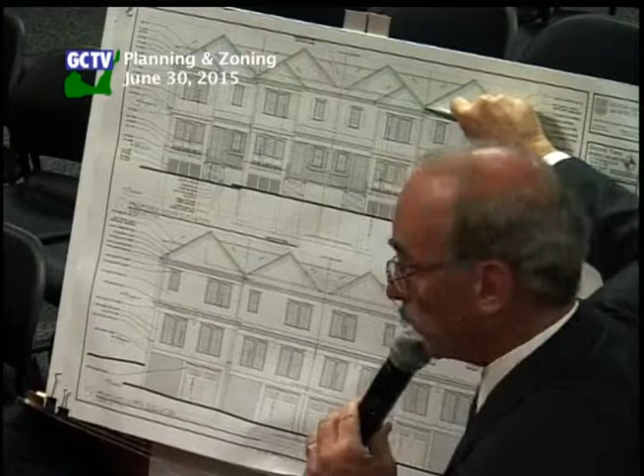Can you go back? Where are you on the height - still within the 40 feet? When we had this as our height, we were within the 40-foot height. But now our roof height will be here, which will be less than what we originally had.

Does the proposed parapet exceed 4 feet in height above the roof? If it does, it's got to be measured to that. The commission can, under that section of the regulations, allow for a higher parapet to screen mechanical units.

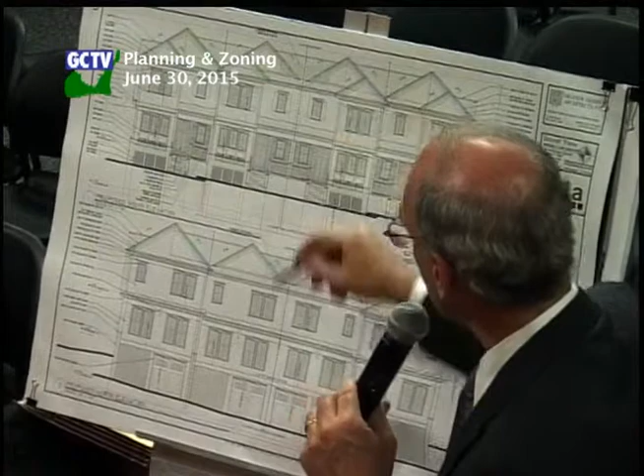Can you tell us how - whether we're doing it as a parapet and permitted, or whether we're measuring from average grade to the peak, we meet the 40 feet, to the highest peak?

Well, can you come back to the carport for a second? I missed how come the carport was okay?

Because any area that is above grade now has a grate on both the south side and then also on the east and west sides.

Okay, can you show us on the floor plan - it's supposed to have a minimum 50% open surface. Where the carport is and what's open on those 2 center bays?

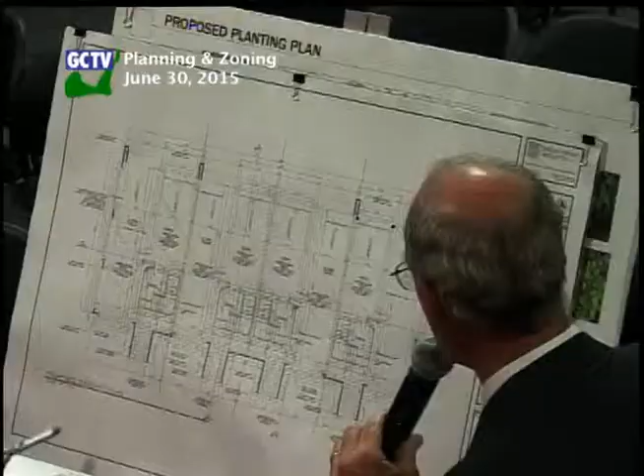The center bays are going to be below grade. Is that what you're doing? There's a slight window well.

This is Rex Gedney, our architect. Good evening. Did you get the name, ma'am? I need a spelling of the last name. Gedney. G-E-D-N-E-Y.

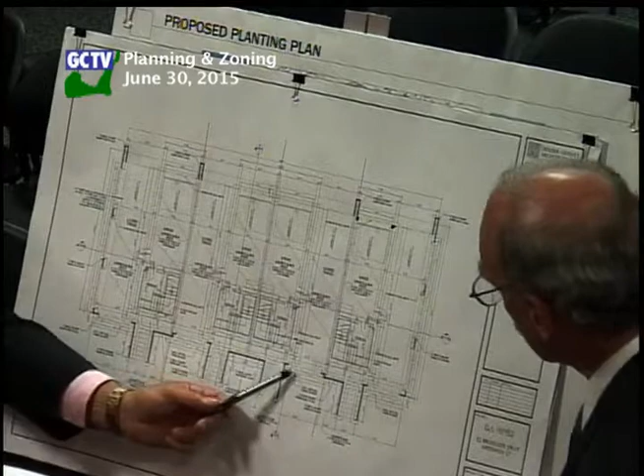There are 2 window wells that extend out approximately about a foot, but it's enough - the zoning enforcement officer felt that was clear enough so that these will be all open.

It'll be screened, but will the lattice work go down to the floor of the carport? Not to the floor, but probably to a sill height about 36 inches.

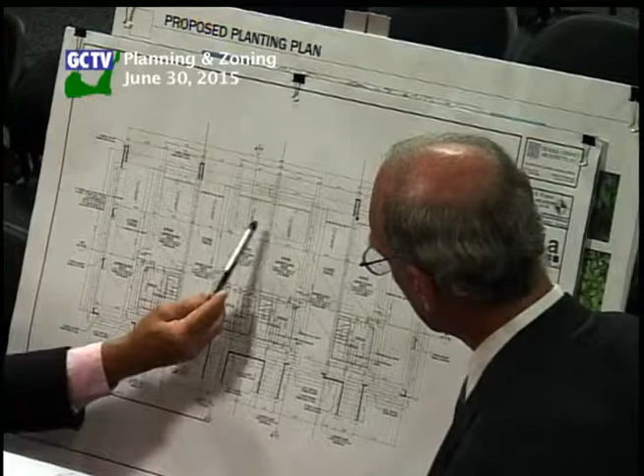Can't be more than 18. Would you outline where the carport is? The carport is this area right here. It's rather deep - you could actually park 2 cars in tandem there, but it's only considered one car parking space. It's the full depth of the unit above, and it's open here and here. This is a garage, and this is the carport for this unit.

So the ZEO - I mean that's less than 50% open - opined on that, I can understand on the units, the lattice has to be 50% open.

I don't believe we've received anything in writing from Mr... No, we haven't. We didn't get these plans to him until later today, but I did have a conversation with him this morning about what would be acceptable. But he hasn't seen these plans specifically.

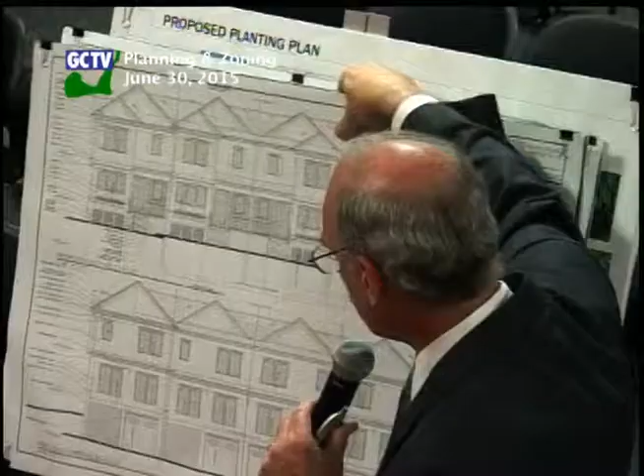No, but I did show him this plan, because I had that this morning, and he said on the east and west sides, if you open those up, he'd find that acceptable, so long as anything above grade is left open.

Your architect said you're putting in a window well. We're actually lowering it more than what I explained to him this morning. That's true, because I had said this is grade, and we would have that with lattice. That needs to be shown on your drawings. Yes, we'll show that.

Are you going to do that just on the interior 2 bays, or throughout? It's done throughout. But you've got the end walls where you're putting openings in, so that would seem to eliminate that wall, so you're still permitted 2 walls. I do stand corrected, my associate said these do go down to the floor. Thank you, makes more sense.

All right, now, did you ask him about the sitting room and the 2 walls? Did you get to that? We hadn't gotten that far, but I do want to have that discussion.

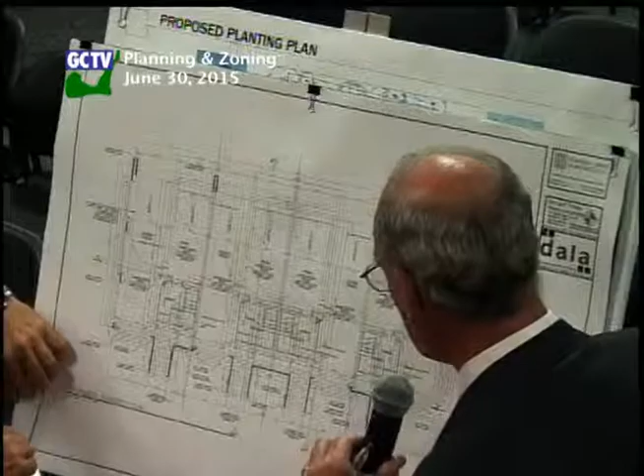There was a question in the staff report as to whether these were 2-bedroom or 3-bedroom. Oh yeah, for the purposes of parking. Yes.

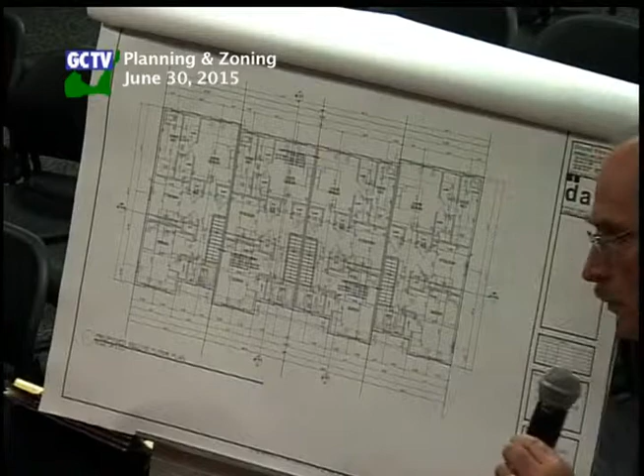And what we've created here, we're calling a sitting room. We have an opening which is 5 feet 1.5 inches. As long as the opening was more than 5 feet, this was not labeled a bedroom before. And the other thing, these 2 have no windows - they're completely interior space. I don't know how they could be labeled as bedrooms. That's a nice catch - we did make these more than 5 feet so it would meet what my experience had been.

Could you run that by Jody too and see if that's okay? I asked him about that, and he said he didn't think he needed to comment on it, but I will run it by him again. I agree with the 2 center units where there are no windows, but the 2 end units do have a window.

We had made the opening more than 5 feet. What's your point there? I don't think that's the regulation. Okay.

For a room to comply, it would have to meet a minimum size, 5.7 square feet, for egress purposes. Can you speak into the microphone, please? Yes, so the windows would have to meet a certain square foot area in order to comply as egress, which is required out of a bedroom or habitable space. So we were going to keep the window below that standard so it doesn't have to be made a bedroom.

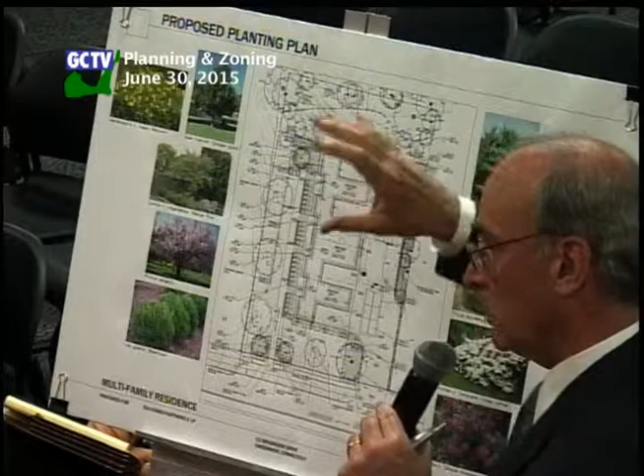Along the retaining wall in the back, we're showing evergreens on top of the existing wall. At this corner, the wall is already 9 feet high from the existing grade down to the property of the lighting store. It screens the tractor-trailer body there very well. We only see a little bit of the top of it from our property.

And we're showing shade trees on the south side. It's a very extensive landscaping plan. I think we've really addressed the issue that was brought up by conservation.

One question: I thought white pines were not considered a good tree to plant. I remember it came up at the field club when they were putting in those large trees, and we talked about going to white pines, and everybody said you're crazy, because they let limbs break off. So my question is, I didn't get a negative comment on it in Alexandra's report. She didn't comment negatively on it. I was just throwing it out to see if there's any negative. The thought was that they bush out well, grow fast, and provide great screening, but all the things about growing fast usually means they break apart fast too. It's not much they're gonna hit down there, but I'm just saying, if they're okay, they're okay.

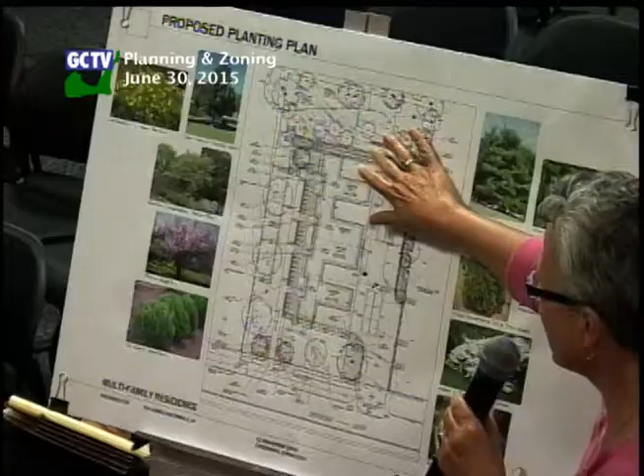Usually we would use a spruce if we were on grade, but this is quite a bit lower than the existing grade, and this is far out in an area that there's freedom to do so. Plus, by the time they get to the level where they may start to break, it's going to be many, many years from now. The bottom branches do drop off — that's why we tend to not use them for screening if it's on a level. But because this is so much lower, we're going to get the screening we need, because, no offense, we really don't want to look at their parking lot.

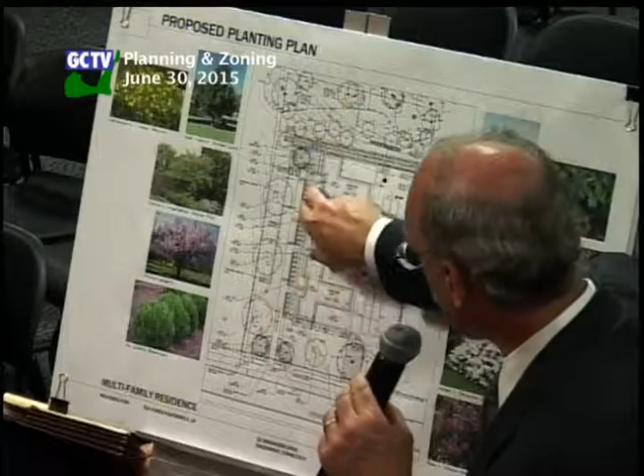Is there any exterior lighting? The only lighting will be for the doorways, there's no standing lights, they're just above the doors. And nothing above the garages? Just a recessed light above the garage.

Good evening, Mr. Chairman, final site plan and special permit. Good evening, Mr. Chairman, members of the commission, for the record, Chip Haslam for the applicant. I learned this afternoon, about the same time that Pat LaRow did, that in addition to the commercial unit I was seeking approval for, there were 2 units already in place, not just one. This is when I was trying to identify who the tenants had been historically for you tonight. So I explained to my client that until we get to the bottom of this and resolve that issue, I thought it was an insurmountable problem for you to consider the application tonight. On that basis, I've gotten approval from him to withdraw the application and try to get to the bottom of it and attend to the issue. So I apologize for any miscommunication.

Mr. Haslam, you said there was 2 instead of 1 — do you mean 3 instead of 2? Well, in addition to my client's application I had in tonight, there were 2 existing, so that'd be a total of 3: 2 existing and the third would be hers.